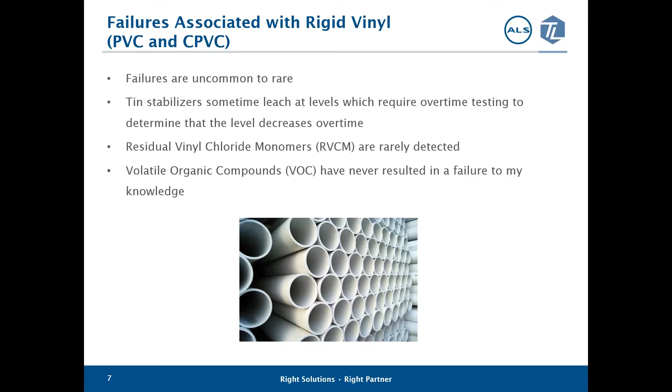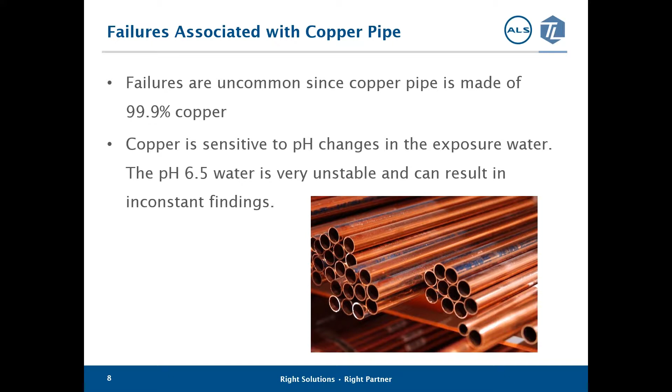Historically, the failure mode for brass and bronze materials has been related to the leaching of lead. Exposure to lead has been well studied, and the negative effects due to lead are well known. We can do many webinars on the leaching of lead from brass and bronze or the negative health effects due to lead. The good news is that manufacturers continue to decrease the use of lead materials as well as finding substitutes for leaded brass and bronze. However, there's still a significant amount of progress to be made in replacing old infrastructures and continuing to find ways to reduce lead exposure to humans, particularly to children.

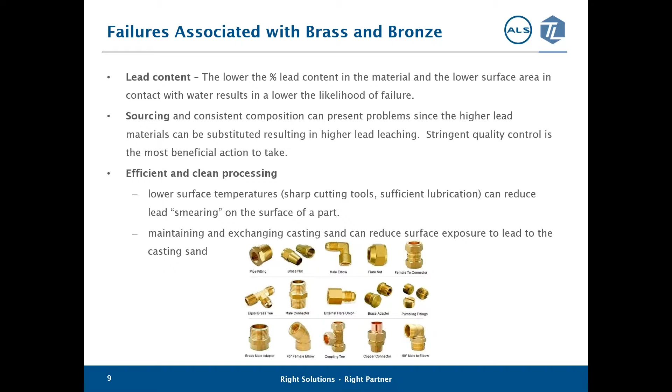There are a few things manufacturers can do to lower lead extraction from lead alloys. The first is the one I had already mentioned, and that is to reduce lead content in metal alloys. The lower the percent lead content in the material and the lower surface area of the lead-containing material in contact with water results in lower amounts of lead in drinking water. Another thing manufacturers can do is to maintain a consistent supply chain. This means that manufacturers must maintain a quality supply chain which assures they are receiving the same low lead material that has been specified from their supplier. Thirdly, lead exposure can be reduced during the manufacture of alloys by keeping the processing temperatures low during the machining process and to change the casting sand on a regular basis to minimize lead contamination of their product.

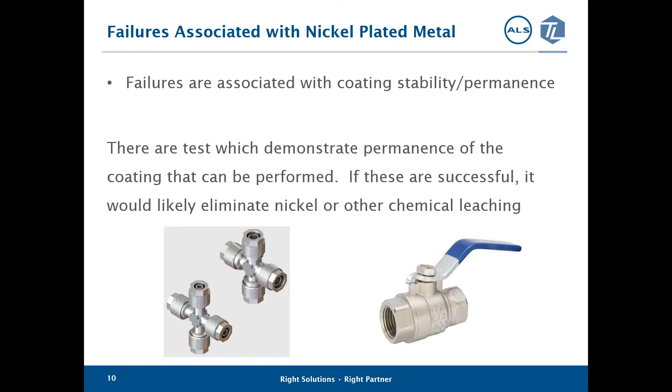For nickel-plated products, failures related to the lack of coating permanence is the main cause of failures. There are tests that can be done by manufacturers to assure a coating will be permanent and the nickel coating does not come off. These tests should be performed by the manufacturer.

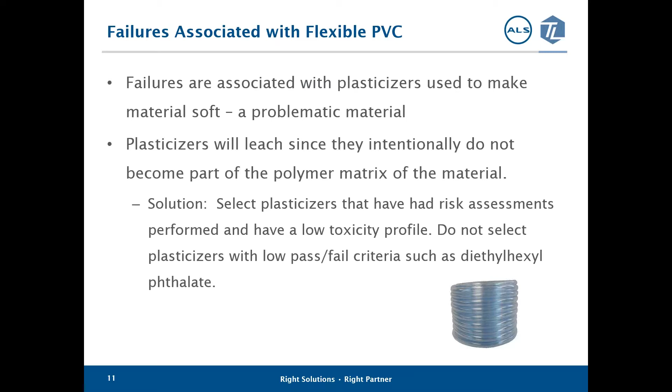Failures associated with flexible PVC are almost exclusively related to the plasticizers that are used to make the material soft. Plasticizers leach because they do not become part of the polymer matrix of the material. The solution for the manufacturer is to select plasticizers that have had risk assessments performed and have a low toxicity profile. Plasticizers like diethylhexyl phthalate or DEHP have low pass-fail criteria, and they frequently result in failures. Using substances like DEHP as plasticizers should be avoided.

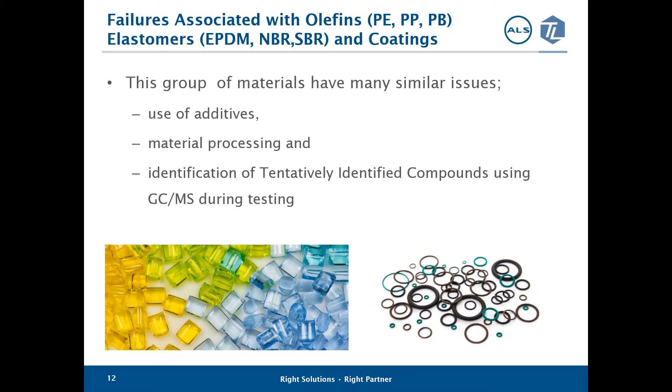In this slide, I've grouped a number of materials together that have a series of common problems because they all have formulations with the same components. All these materials consist of polymers, initiators, terminators, curing agents, antioxidants, and process aids. In addition, they can also contain pigments, antimicrobials, and plasticizers. Not all of these substances become part of the polymer matrix, and the ingredients themselves can contain impurities, degradation products, and hydrolysis products, which can cause failures. In addition, many of the compounds that do extract do not have toxicology data to support a risk assessment. The result is that many of the compounds reported in these material extraction results are compared to an artificially low default pass-fail criteria.

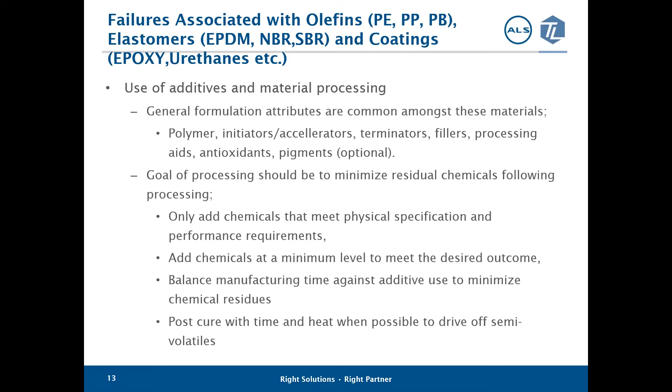There are a few things a manufacturer can do to prevent these failures. The manufacturer would benefit by comparing the purity of their starting ingredients and selecting those with the highest consistent purity, because many of the failures are due to impurities, degradation, and hydrolysis products in these ingredients. Purchasing ingredients with high purity can reduce frequency of failures. Another thing a manufacturer can do is to minimize the use of each ingredient in the formulation by using only the amount that's necessary to meet physical specification and performance requirements of the material, while balancing the manufacture time and the chemical use. Manufacturers can also consider the use of post-curing their materials. Post-curing that includes heat can reduce the presence of volatiles and semi-volatiles.

For coatings, there are a couple of additional factors to consider. Improper mixing and application of the coating test slides can be associated with failures, in addition to clients applying for exaggerated use conditions. The potential issues associated with improper mixing are self-explanatory, but the subject of clients applying for exaggerated use conditions may not be.

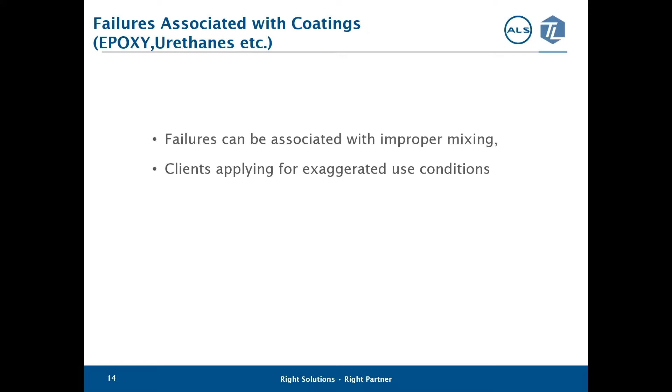Sometimes a client will apply for a smaller tank or pipe size than a coating will be used for due to perceived or real marketing advantages. Test results are evaluated based on surface area to volume ratio, and the smaller tanks have a larger surface area to volume ratio. The final test results come out higher for the smaller tanks, and a product would fail when it otherwise would pass if it was evaluated to the proper size tank or pipe.

This slide provides information which shows failure frequency of various products. This was published by NSF on their website. You can see that the faucets and coatings are reported to have the highest frequency of failure at 13%, and the remainder of products average between 5 and 6%.

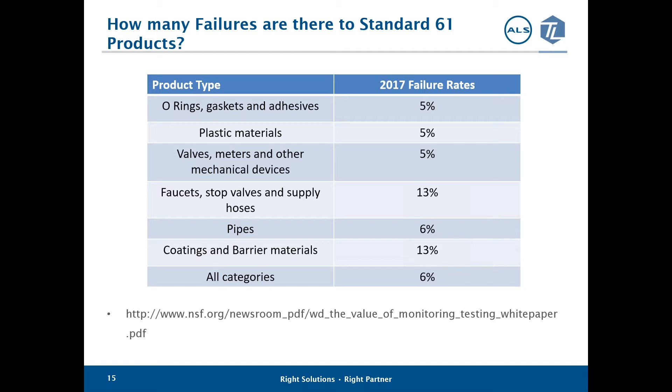Next, I would like to talk about the impact that the various test methods have on the outcome of testing. The methods listed on this slide are the most tested methods used for products evaluated to Standard 61. They include various specific test methods for single compounds, EPA method 200.8, which is used for metals, EPA method 524, which is used for VOCs, and EPA methods 525 and 625 for semi-volatiles.

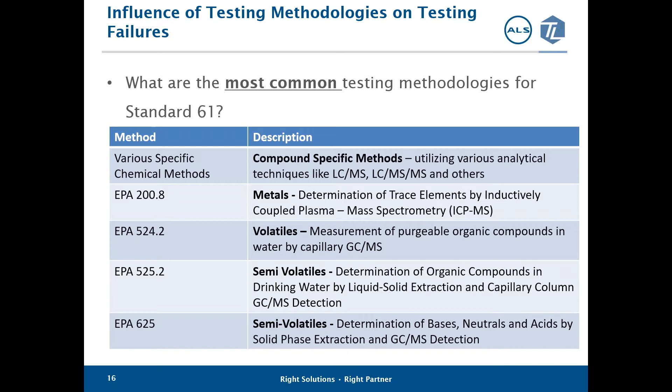Semi-volatiles, as the word suggests, are organic compounds that are volatile but not as volatile as some of the compounds you would consider as volatile, like toluene, xylene, benzene, and others. You can see on this slide that there is a certain amount of error that's associated with the various testing. Compound-specific methods where standards are used, and EPA method 200.8, have a low amount of error and provide accurate results to within plus or minus 3%.

EPA method 524 also provides very accurate results. The higher percent error occurs at the lower concentrations, and accuracy improves at higher concentration. And this level of accuracy of plus and minus 3 to 10% is the same for EPA methods 525 and 625 when there is an authentic standard used. The error in measurement greatly increases to plus and minus 100% or more for GC-MS methods 525 and 625 when authentic standards are not used.

The vast majority of product failures are due to compounds identified using these methods, which do not have an authentic standard for comparison. This group of compounds are referred to as tentatively identified compounds, and most of these compounds are evaluated using artificially low pass-fail criteria of 3 and 0.3 parts per billion due to the lack of information. The unfortunate irony is that the compounds that have the greatest error associated with their measurement are the same compounds that have the least amount of data to assess their safety.

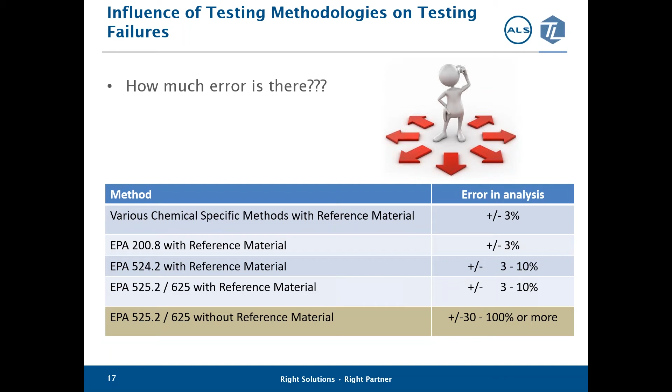This table shows the number and percentage of compounds that are reported in the pass-fail table in Standard 600 for compounds that are tested with reference materials and those that are tested without reference materials. Most manufacturers could not be expected to predict what may be identified prior to having their product tested for the compounds that are tested without reference material.

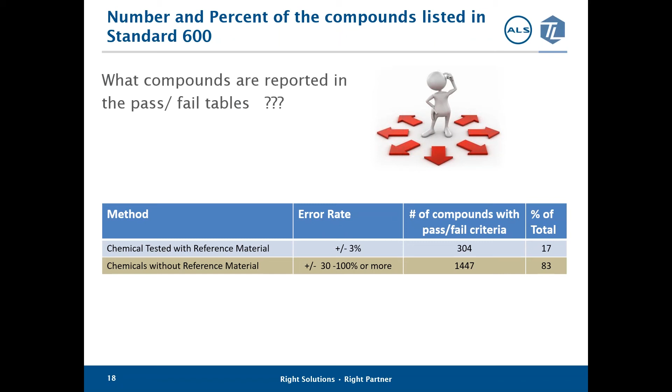While this collection of data is not a direct reflection of the failure rate due to the compounds that are tested without a reference material, our experience is that the failure rate for this group of compounds is actually higher than 83%. And it allows for an exemption of evaluation due to the lack of certainty regarding the identification of the compound and the inaccuracies of the analysis.